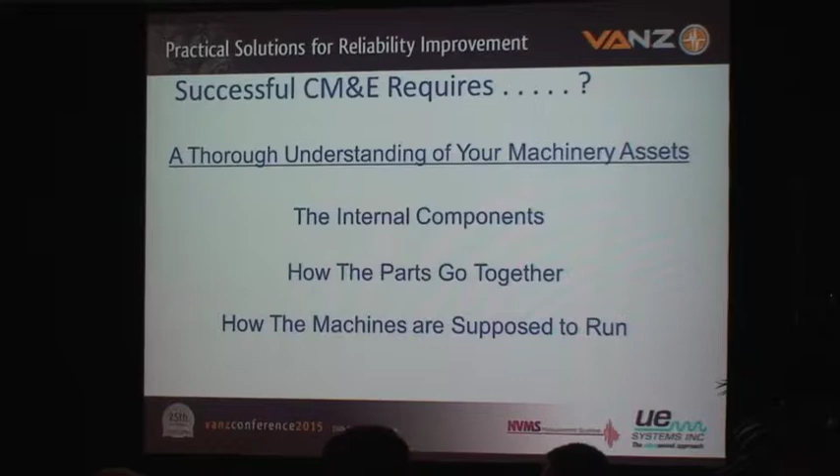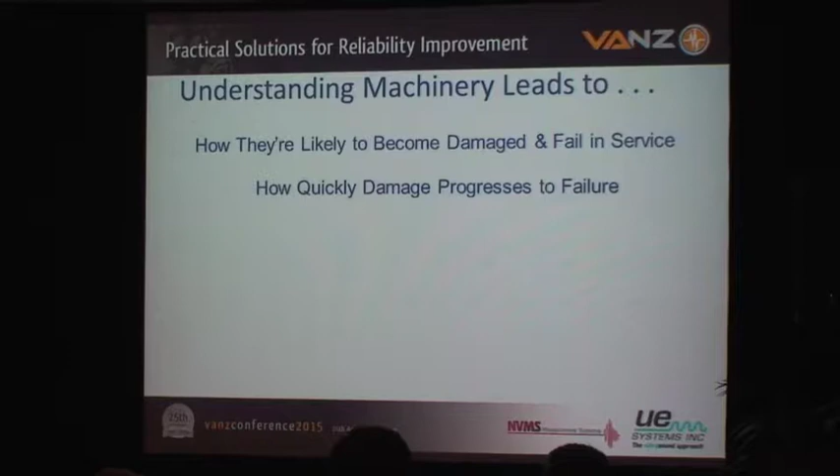If you've got that level of understanding of the machinery, then the technology that you apply is a relatively simple leap forward. So when we understand the machine and we know how they're likely to become damaged or how they're likely to fail in service, which I can pretty well guarantee you everybody in this room already knows and can already do, we apply that, we know how it's likely to be damaged, we know how quickly it's likely to progress from when the damage starts to when it fails.

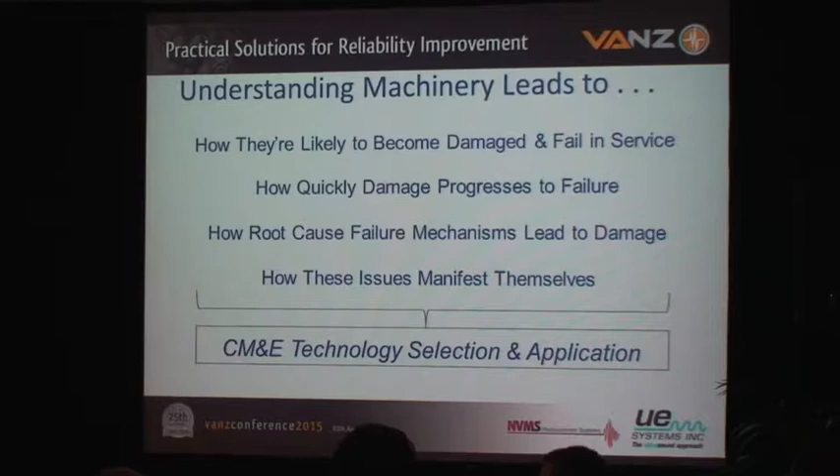We understand the root cause failure mechanisms that are in play that cause the problems on the machinery. And ultimately, we have an understanding of how these issues manifest themselves. That's really what successful condition monitoring and evaluation for reliability improvement is all about. So when we understand all of these factors, we know what condition monitoring and evaluation technology to apply and how frequently we need to apply it.

So the comment on the PF curve, as Jason indicated yesterday, Moubray in the late 90s, as far as I can tell, is the first one that ever actually published it. But basically, we're looking at the time health of a machine. And when we start, we're looking from when a machine is first repaired, rebuilt, brand new, put into service. In theory, it's going to run with good functional health for some period of time. It gets to a point where damage starts.

And when I talk about damage on the machine, I'm talking about an irreversible damage. Something physically bad has taken place. Once that bad thing has happened, the operating health of that machine will start to degrade. It's not going to fix itself. When you've got physical damage, the problem is just not ever going to go away on its own until it gets to the point of functional failure.

And again, for me, functional failure doesn't necessarily mean bits of metal flying around the room because the thing's gone catastrophic. It just means that machine is no longer able to produce on demand, at capacity, or within quality standards. Any one of those 3 attributes is no longer achievable, that machine's functionally failed, in my opinion.

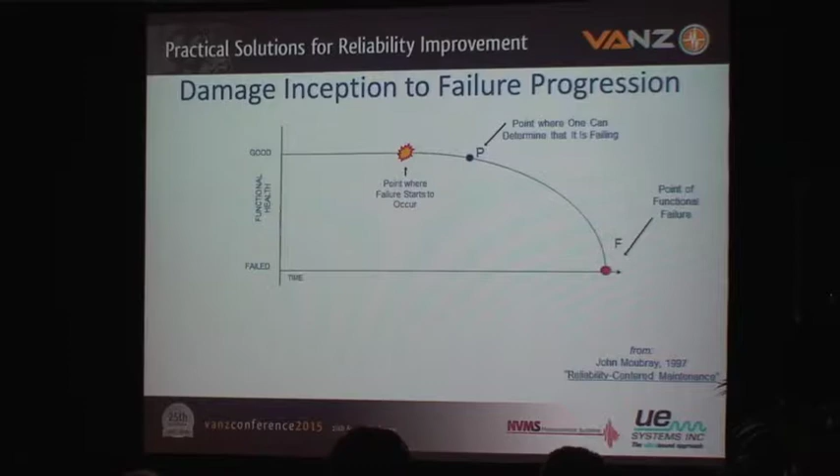What Moubray said, and again, as Jason mentioned yesterday, is somewhere along that degradation curve, he introduced a point P. The point P represents the time where the potential for failure is recognized. It can be identified by some objective measurement or observation. So you've got degradation, it's progressing, and then it gets to the point where you can see it. Using some technology, you could hear it, it could be just a visual observation. But the bottom line is we now recognize that there's a problem.

So the time from point P, where you can first perceive the fact that failure is in your future, until we get to the functional failure itself, Moubray refers to that as the PF interval.

And basically, we in the condition monitoring and evaluation on the supplier side of the business for a lot of years have been using that PF interval to justify what type of technology and how we apply the technology to help folks recognize that they've got a problem at an early enough opportunity to plan to take some level of corrective action prior to the functional failure.

I mean, that's really been, whether a lot of us have admitted it or not over the years, it's really been the basis for how we say to someone, I recommend that you do this, or I recommend you do that. It's based on understanding the machine, how it's built, put together, and supposed to run, the failure mechanisms, and how those failure mechanisms manifest themselves.

But we've always been on that right-hand side of the curve. So we've put ourselves over the years, and we've done this as a vibration community, we've always put ourselves on the right-hand side of the damage point. When we identify that something's gone bad, it's not a question of if, it becomes a question of when.

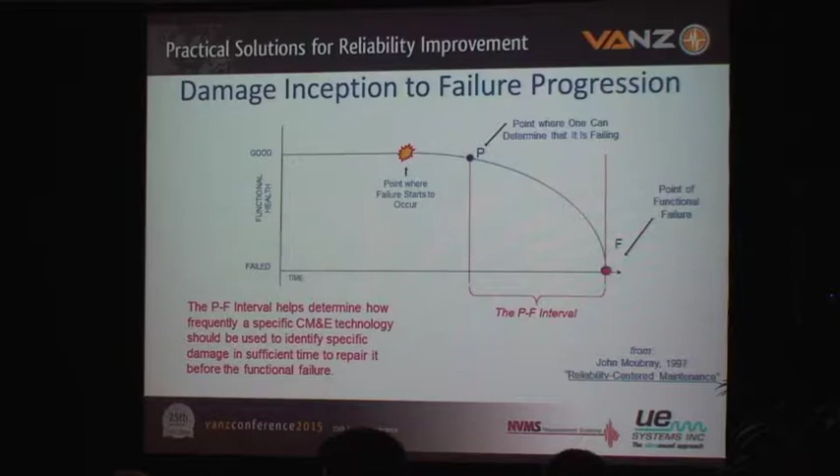One other thing that we tend to ignore or not pay enough attention to, in my opinion, is the fact that machines have multiple failure mechanisms. And everybody's seen the version of the PF curve where somebody's going to say, well, you've got the P1 point, and that's the closest one to where the damage happens, and this technology sees it first, and then that technology, and on and on until you get down the line. I really don't want to go there specifically.

But the point is, different technologies will see different failure mechanisms in play at different times along that progression from good functional health down to functional failure. But the other thing that we need to keep in mind is that there's multiple failure modes. And I'm only going to just show 3 as an example. But machines have multiple failure modes, and each of those multiple failure modes have different point Ps along their failure progression, depending upon what technology you use to identify.

And obviously, with vibration over the years, we've been pretty proud of the fact that vibration is one of the technologies that allows us to identify and recognize the fact that damage has happened very early in the process, after the actual irreversible damage has started. Everybody good with this so far?

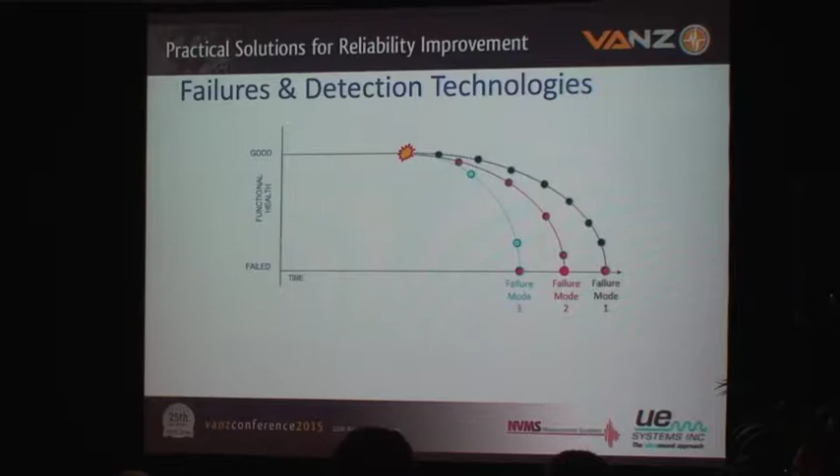There was a nuclear power plant in the U.S. that I'm familiar with, but I'm not allowed to say which one it was, other than it wasn't the one that I worked at. But a good friend of mine who was in a similar role in a different facility went through this experience, and it was not particularly pleasant for him. There was a real rinky-dink pump that was surprisingly critical to the process. Through vibration, he recognized that the bearings, it was an overhung configuration, the bearings were degrading. He could see that in the vibration.

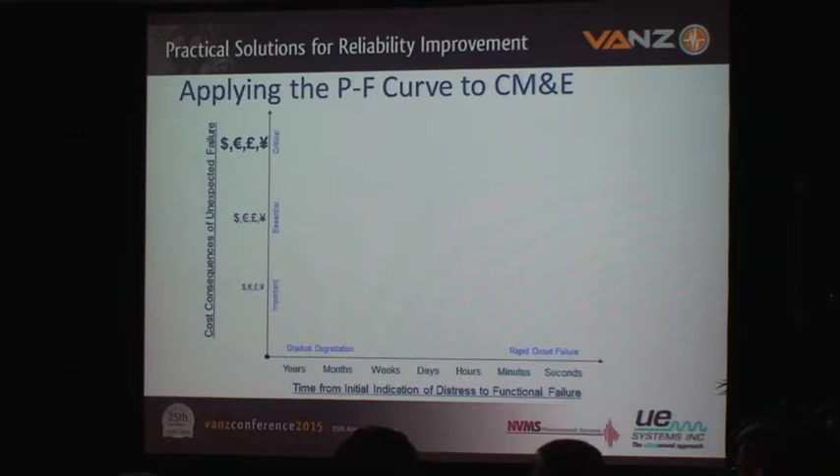So when we look at this, and again, I'm not referring to any specific technology, but for those things that degrade gradually, they take a long period of time to go from initial indication of a problem to the functional failure on that machine. We can probably be looking at things like walk-around portable-based systems. They could be portable vibration data collectors, could be portable infrared thermography.

Again, I'm trying to be not particularly technology specific here, but if the cost consequences of the failure, and this is potentially an either-or situation, if the cost consequences or the amount of time from initial indication to failure aren't really that great, go ahead and use portable instruments. There we go.

On the other hand, as you start moving up the value chain in terms of the cost consequences, or your ability financially to tolerate a sudden unexpected failure of the machine, or the time from first indication to functional failure starts to move from years and months down into months to weeks to maybe even some number of days, we ought to be looking at some installed technology that is periodically evaluating the machine, taking data, giving you an evaluation of the machine's condition.

Again, all with the idea of saying, I need to know as early as possible in the process so that I can do the right planning, scheduling, get the resources in place so we don't have that huge cost, which, like I said, more often than not is really lost productivity more than the cost to do the repair.

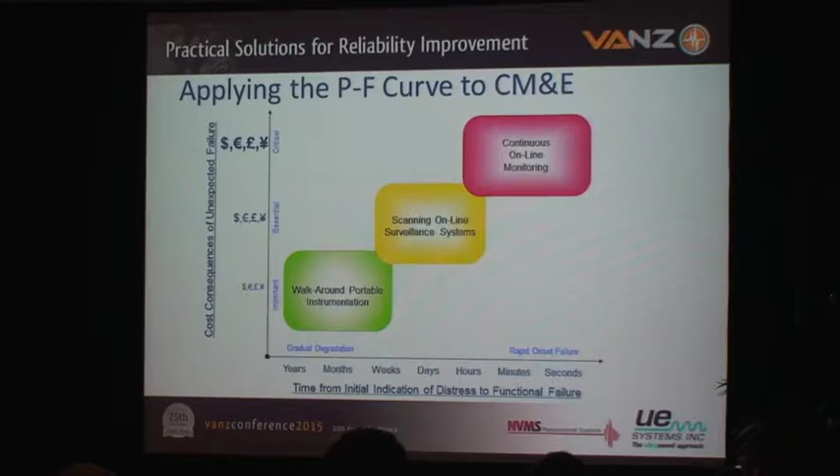So we good with this? Cool, because now we're going to go back to the PF curve. And like Turner Classic Movies in the States has taken all the old movies and colorized them, I kind of felt that the PF curve needed just a little bit more jazz when we look at it.

So again, when we talk predictive stuff, we're talking the right-hand side of the curve. Once the damage itself has actually started, it progresses to the point where our instruments or our senses can detect the fact that something's gone wrong, and if we don't address it, damage will eventually get to the point where we get to that poofy little cloud at the end, functional failure, not able to produce on demand at capacity or within quality standards.

What I think we need to do a better job of as a reliability community is working before the damage actually starts. And so what I've done is I've added this little green to blue transition zone to the left side of the curve before we get to the point where the damage starts. I was talking with Jason last night. I think Jason kind of mentioned a little bit about the flat part of the curve.

But my position is that if we started to focus ourselves not on indications of damage, I mean, we can never stop doing that. Don't make it sound like I'm not in favor of looking for known bad bearings and things like that. But if we would spend just a little bit more time focusing on the manifestations or the indications of root cause failure mechanisms, we could do ourselves a lot of good.

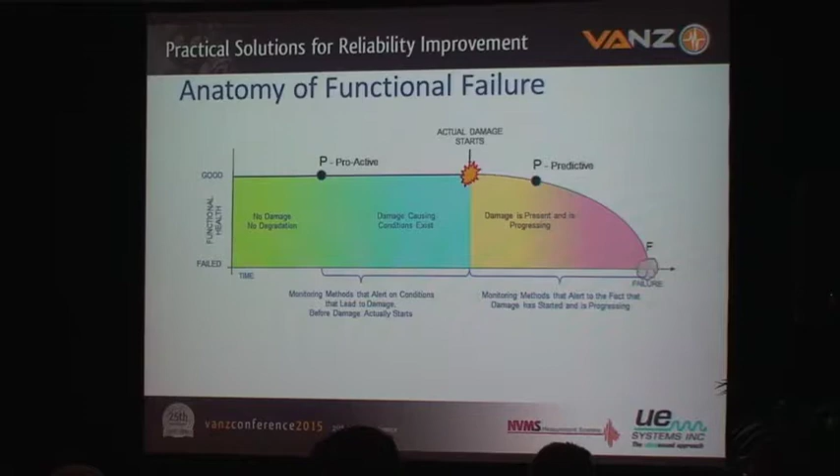So I kind of segment this a little bit, and these methods on the right are the methods that we use to identify the fact that there is damage that has started and is progressing. But if we focused on the left and started thinking in terms of, I need to identify the fact that there is a root cause failure mechanism that is actually in play, and if I can address that, I can avoid getting to the damage point. We can save ourselves a significant amount of money in terms of not having to do the big job in favor of simply doing the little job.

Because the one thing that I think most people in this room will probably agree with, functional failure on a machine is not an event. It's an event if you don't recognize it in advance. It's a process. Machines generally, bearings don't just fail out of the blue. Machines don't just fly apart. There's something that causes that to happen.

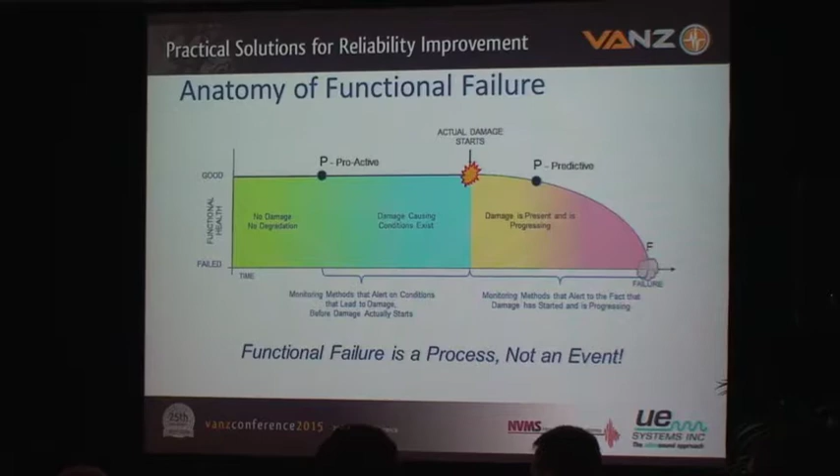So what we found over the years from, again, personal experience and conversations and case histories I've gotten from colleagues, not only in industries that I've personally worked in, but other industries, it's pretty easy to see that if you can address the problem at the root cause level before the damage starts and prevent the damage from happening, you never get to that point in the middle where it goes from blue to yellow.

But when you do get to that point, clearly you've got a step change in the cost to repair or return to service. And again, the potential exists for the increased cost associated with lost productivity when you get to that point. And of course, if it continues to progress unaddressed, as time goes on, it only becomes more and more costly in terms of parts, repair, labor, but even more importantly, lost productivity. If you ignore it, it just gets worse over time.

Is that consistent with you guys' experience? Anybody got any questions, comments, concerns? I'll even take opposing viewpoints.

Go ahead. I think it's important to realise that Moubray, although he came up with this years ago, in his book he spends about the first 4 or 5 chapters explaining how this came about. And one of the things is, where you've got proactive there, that's in their case talking about a widget that's installed to a specification. Right. And that's where the issue comes in with looking at that curve and not understanding that. In other words, the failure mode is the same regardless. And as you quite rightly showed there, those actual modes, or the steepness of it, the sudden failure type thing, is as much to do with the installation specification as the actual plant.

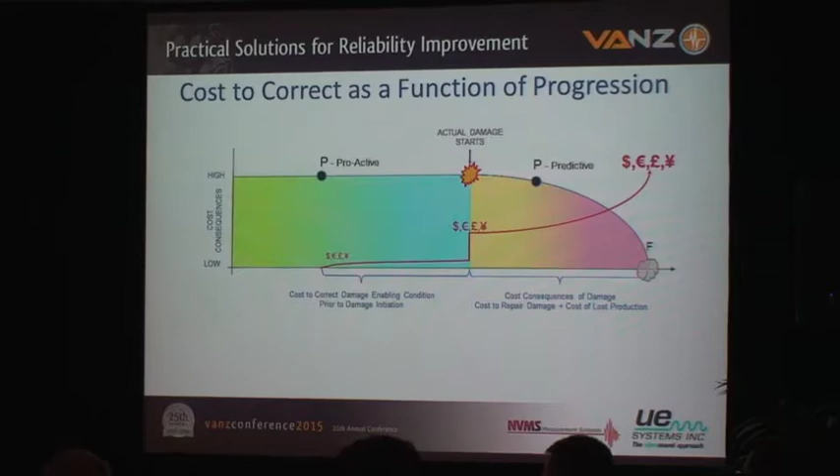Hopefully, we're providing our management team with enough information to appropriately plan and schedule the work. And if we can do that and be successful with that, things are good. So moving on from here, as I said, I propose to you that there is a proactive point P where you can identify the fact that a root cause failure mechanism or multiple failure mechanisms is in play.

When I think back historically over the years, I always used to have a friendly rivalry with the lube oil guys. Because the lube oil guys, for years and years, always felt that they had the lock on proactive condition monitoring technology. How many of us have heard that? We've all heard that. The lube oil guys will stand up there and say, lube oil monitoring is going to give you really proactive stuff because we can identify things in the lube oil that are going to cause a problem for the bearing.

Chris, if I made a statement that greater than 50% of failed bearings failed because of some issue with the lubrication, how accurate, as a bearing guy, would you say that is? Oh, yeah. You're my hero. I've seen a number of studies. I just needed to get validation from a bearing supplier. I've seen a number of different studies over the years from various bearing manufacturers.

When they get bearings back for failure analysis and take a good hard look at them, it's really rare to find a bearing that has failed metallurgically or from a manufacturing perspective. What kills more bearings than anything else is problems associated with the lubrication. Because it's the lubricant that really carries the load, right? It separates the metal parts from actually making direct contact with each other.

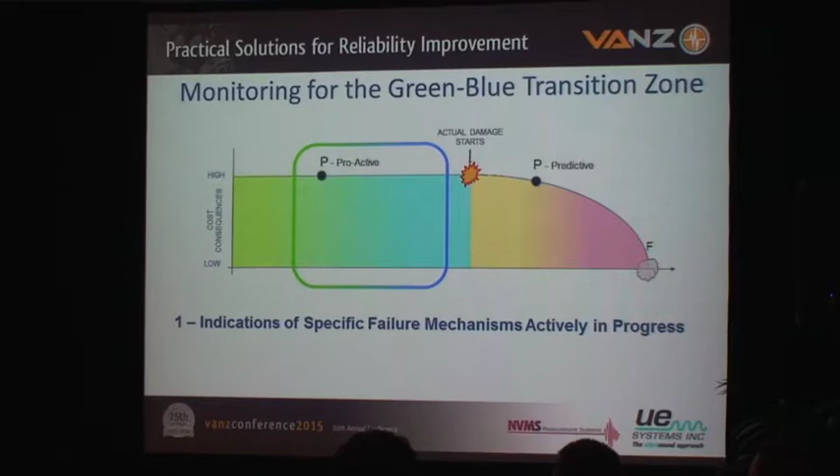I can pretty well guarantee you that everybody in this room has the capability in their vibration systems to be able to look at the data that you're acquiring and recognize when there's a problem with the lubricant. We can see it. Now, it would be ridiculous for me to stand up here and say, I can tell you the difference between moisture in the oil or contaminants or just silicates or dirt. We can't do that with vibration techniques.

But we can look at the thing and say, this lubricant is not doing its job. And if it's not doing its job, you can always draw a sample to figure out why. But if we can tell you with a vibration method that the lubricant's not doing its job, with any luck, we can start getting some corrective action in place, moving in the right direction to get people to address the problem with the lubricant.

Like I said, I can't tell you what it is, but I can tell you that it exists and that it's in play. And as much as I'd like to stand up here and say, hey, our vibration stuff has the best detection method, face it, all of our competitors have some pretty darn good methods for identifying and recognizing these kinds of problems in machines.

And so if you're not using that, and if you're not looking at using these techniques proactively to say, hey, this failure mechanism is in play, may not know exactly what it is. And honestly, I don't care. Just knowing is enough for me to move forward.

The other thing, and I'll be talking a little bit more about this in my presentation tomorrow, the other thing that I'm really big on focusing on is changes from normal operating behavior on a machine. But consider this the teaser before the commercial for tomorrow's conversation.

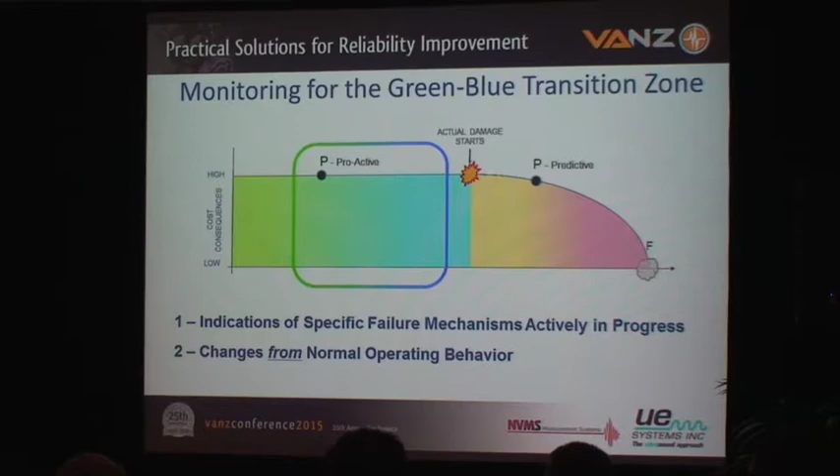But if I can conclude the discussion of proactively looking at your data rather than just looking for the classic bearing defect frequencies and their harmonics. Because face it, we all know when you see those classic frequencies, it's already too late. It's not a question of if, it's a question of when. I like to talk about one of the primary root cause failure mechanisms in machinery, and that's friction. Pure and simple, it's friction. Localized excessive heat buildup is what's going to lead to more functional failures than just about anything else.

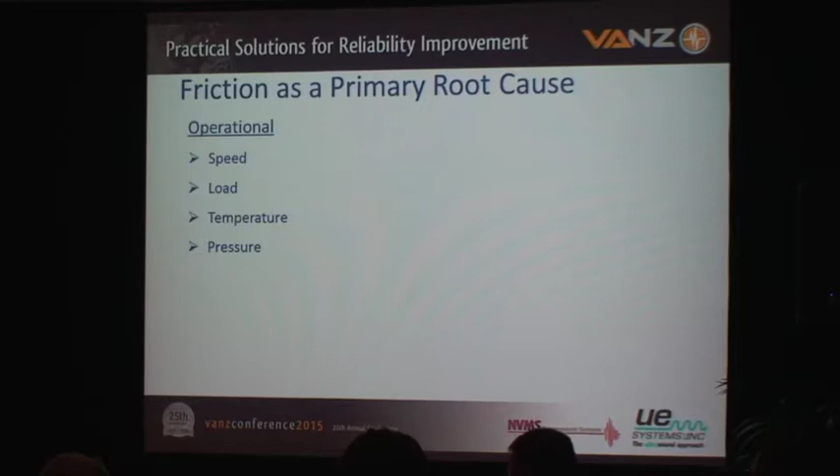So when we talk about friction as a primary root cause, there's different things that affect friction. Friction could be affected operationally. Speed, load, temperatures, pressures, what you happen to be doing with the machine at any given time impacts the friction that the rolling elements or the journals, the most sensitive parts of the machine, are likely to undergo.

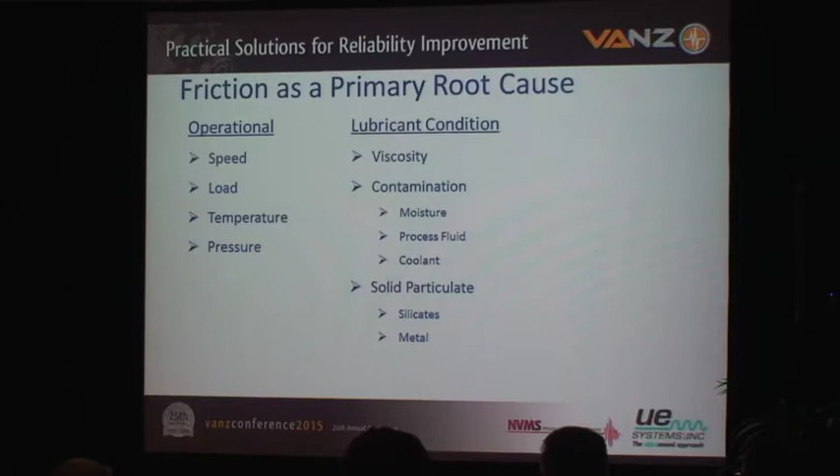Similarly, the lubricant condition, as we've been discussing, impacts the friction. If the lubricant's not able to carry the load, heat's going to build up, it's going to increase, it's going to lead to failures. And surface condition also affects friction.

But generally speaking, unless particulate contamination is in play, or a lubricant is really degraded, it's rare these days, at least in my experience. I'm sure others may have different experiences here in the room, but I think it's rare to find initial surface conditions in bearings being a problem.

The bottom line is, when we talk about what's going on with damage, friction leads to damage, and I think of friction as impacts at the microscopic level. Because face it, you never get a perfectly smooth surface. We like to think we will, but we don't always get there. Friction is impacts at the micro level. Damage is impacts at the macro level. Right? I mean, everybody can pretty much agree to that.

So if we can recognize the increases in friction before we actually get to the point where we're seeing the impacts, which are the indication of damage, then we've done our job. And again, we've taken our program from a reactive damage assessment program to a predictive, to a proactive, I can get this solved before the bad thing happens approach. Then I really think we're doing ourselves, our technology, our whole industry a major service.

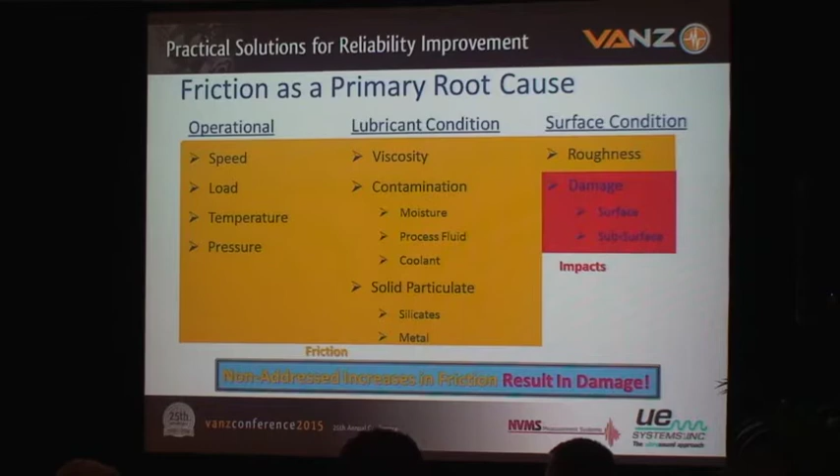And ultimately, unaddressed friction leads to damage. And just from my experience over the years dealing with a ton of folks, I really don't think we do as much as we can with our vibration monitoring to focus on friction as a failure mechanism. And like I said, I think we all pretty much already have what it takes in order to do that.

I strongly, strongly encourage you to be using these techniques and look for some of these subtle indications, these subtle changes. Because an increase in friction, which is what's going to lead to damage in most cases, there's all sorts of different ways that you can see it. And the actions that you as the analyst or the person making the recommendation to management as to what needs to be done can start doing.